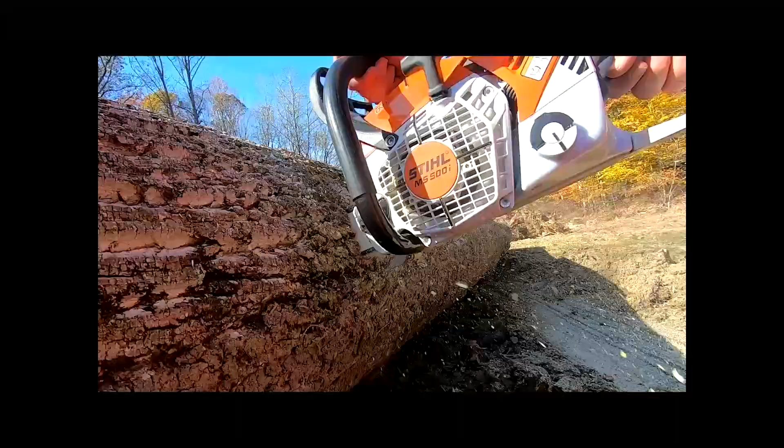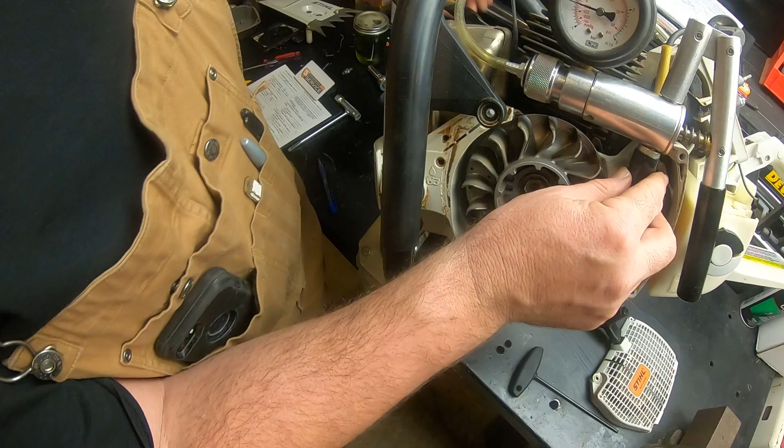Making sure that we don't have a leak anywhere. I think we're good and tight. We don't have any air trying to get out of there, and we can sometimes miss a little bit of feel, but that gauge will keep us honest on that. We won't be having a problem there that we're not seeing.

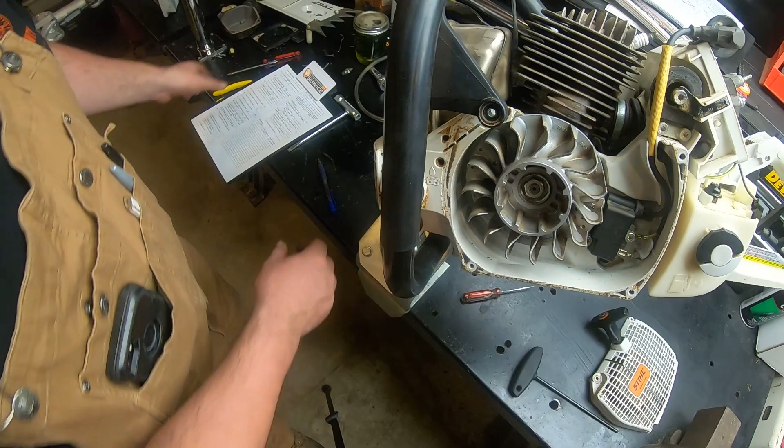So now we have another item we can check off of our list here on our Stihl Engine Check. So we're down here to crankshaft end play, is okay. Pressure test the carburetor. And now this right here is all going to be on our carburetor.

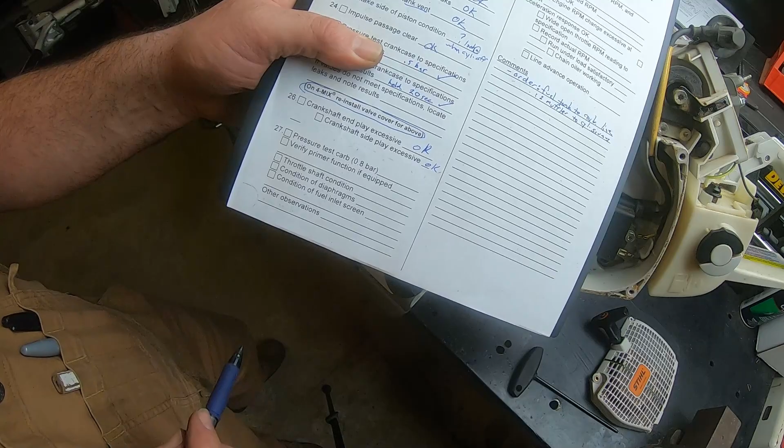All right, since we used our carburetor for a test device, we're going to have to retrieve it real fast so that we can use it.

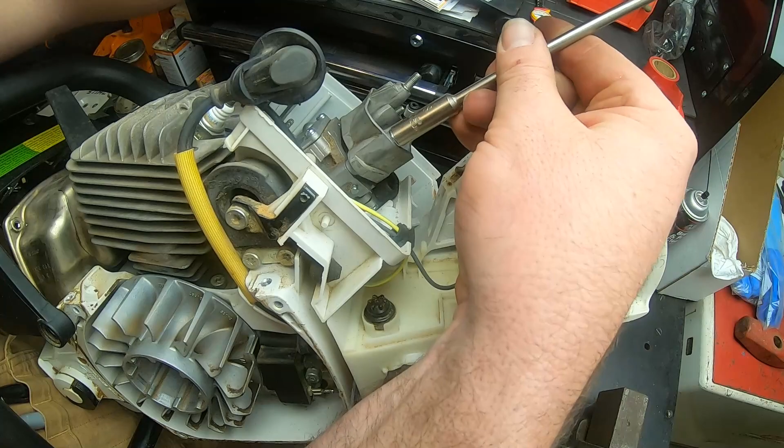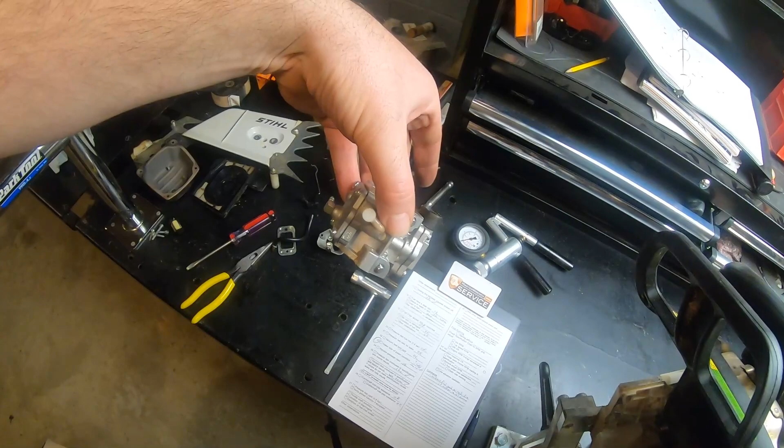Set that out of the way, put our screws or nuts with that. We're just going to use this guy out of here. Now, most times whenever we are dealing with a carburetor, it's just about more beneficial to change it out. And what I'm going to do, I'm just going to take a piece of bulk fuel line, push up on there, put the other end in our tester.

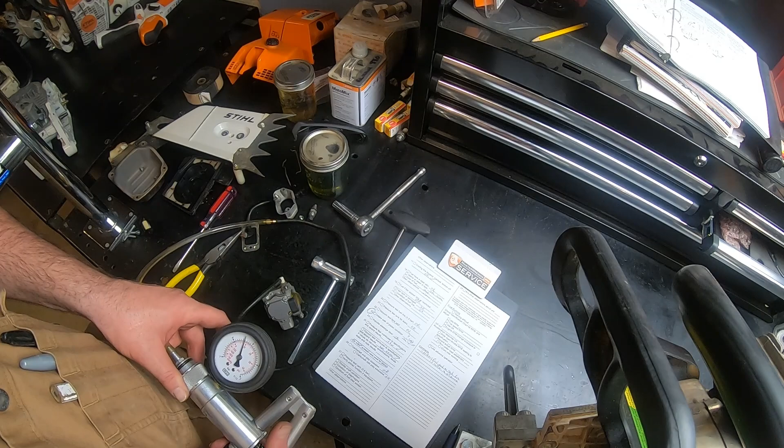And our pressure spec here, according to our sheet, is 0.8 bar. So look at that, I hope you can see that. So we're going to again inflate this air system right here to 0.8. Now, unlike our tanks, we're kind of back like we were in the beginning. It's not going to take much to get that pressure to 0.8 bar. So we're just going to poke on this real gentle, put up to 0.8 right there.

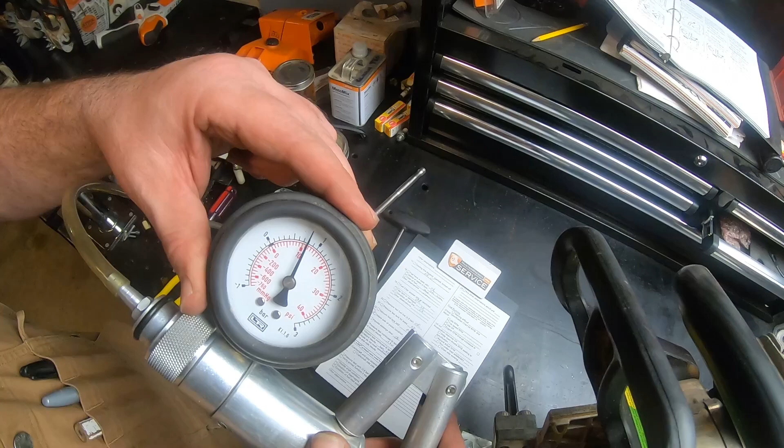Okay, we're going to test it. It seems to be holding really well. We're hanging out right there where we need to be. So we're going to check this off as okay.

Verify primer function. Now what we want to do now is go ahead and look at our throttle shaft to make sure that it is where it needs to be.

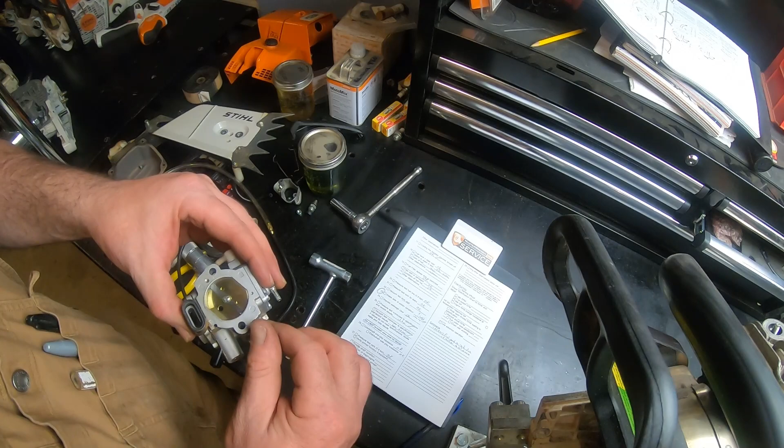So we'll remove that guy. And we want to check, now this is going to be our choke plate here. It's the first one we come to when this is the way the carburetor sets on the machine. So the first one you come to, the choke plate, the one around behind it is going to be our throttle shaft. So we're going to feel that thing, make sure it feels tight in every position, and it does. It feels great, no problems there.

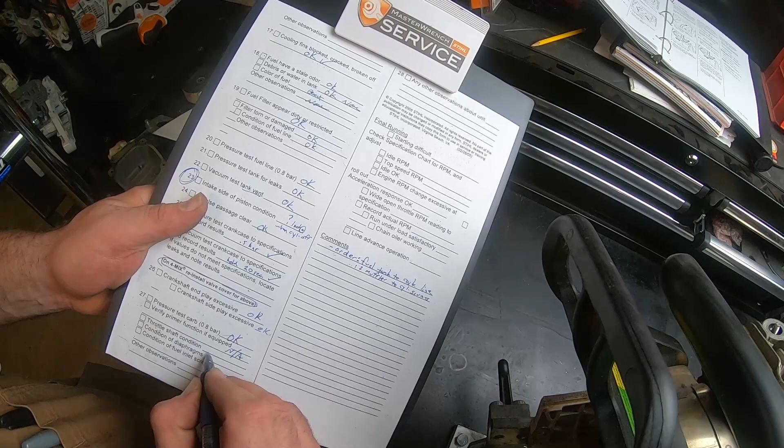All right, and again, we verify primer function. 880 does not have one, so we'll just put NA. Throttle shaft condition, okay. Condition of diaphragms. So let's look at our diaphragms here real fast.

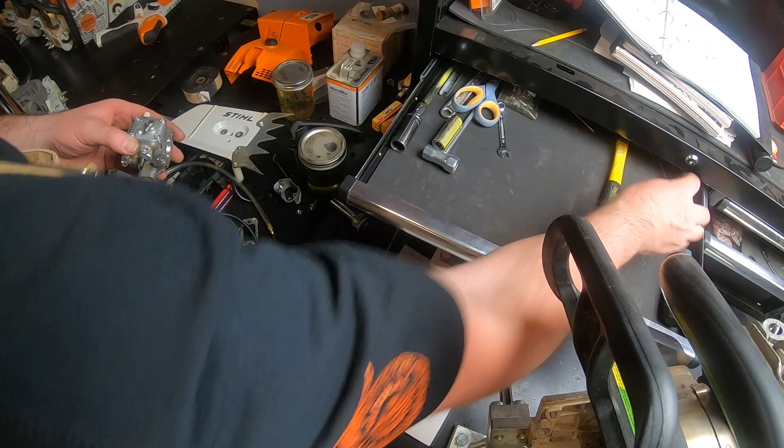And to do that, we're just going to take a little screwdriver, peel this guy apart. And again, this is going to be our fuel pump side that we talked about earlier, that where trash can get built up in, that one time we saw. But what we're looking for here is a tear mostly. Tear is going to be our biggest concern right here, or one that is really stiff and not pliable.

If it's gotten hardened, if the material in it has gotten hardened, then it's not going to flex well. So I'm going to hold my thumb down tight on that as I take the last screw loose so it doesn't deform that upper cap. It's just soft aluminum. And then we'll just pop this off of here.

Well, look, okay, all that looks good. I don't see any problems there. We have little flaps in there. All that looks okay. Alright, I don't really see any problems there. The flaps all look good.

So we'll just put that fella right back together. And sorry, it's most likely the other side going to be where the fuel pump diaphragm is. This is their, it pulls all the way through there. So let's just bolt this back together.

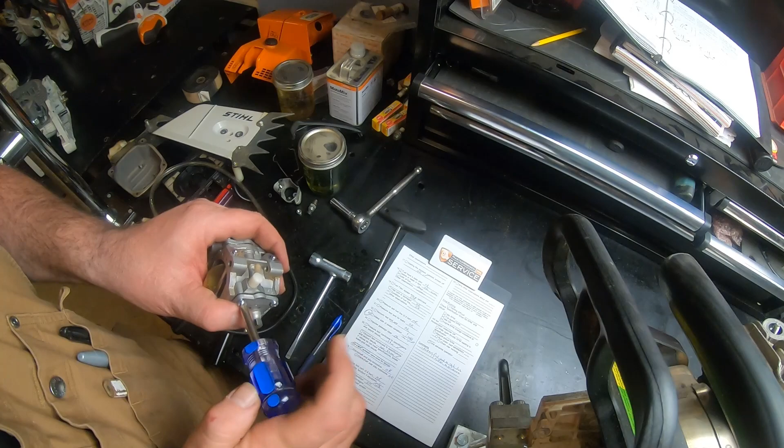I've not had one of these big Walbros apart before. This feels like more like it should be on a 5-horse Briggs or something. It's a monstrous thing. I'm trying to think. Well, those are just big old plates. I like 880s, they're pretty awesome.

All right, let's pull this side off real quick. Take a peek at it.

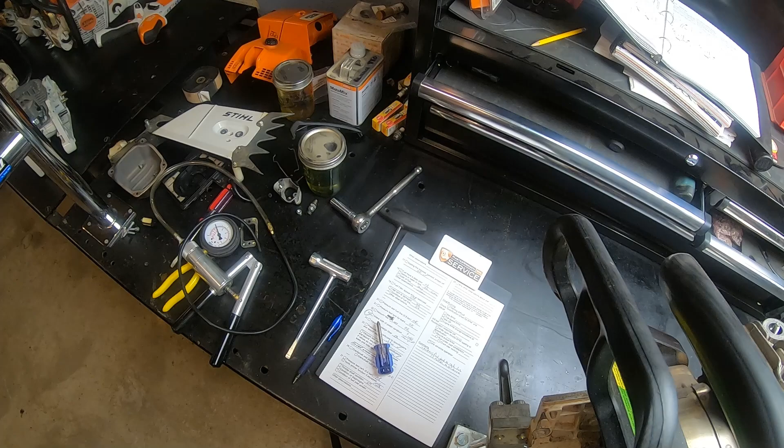Take just a minute and spray some of this off of here. Don't want that dirt getting down in everything. Oh yeah, at least it leaked on our paper, right? It should dry fine. Yeah, that looks better.

Excited to get this thing back together.

Yes, here's our fuel pump side. This is going to be our fuel pump diaphragm, and it should be going up and down. We just spray that, when I had that screw out, it put a little bit of gunk in there. There we go, yeah, that looks really good. Now what we're looking for is pliability. That looks good, I don't see any tears in there. So we're going to say that fella looks okay. You can kind of see there.

Okay, our carburetor all looks good on our fuel pump side. All the little pieces on the other side look good. It pressure tested good, so we're going to call this okay. We don't have a problem here. Now let's go ahead and put this back together so that we don't get it contaminated.

While we're putting it back together, I want to talk a little about our sheet. Before we go any further, let's make these notes. Condition, okay. Condition of fuel inlet screen, okay. All that's okay, good.

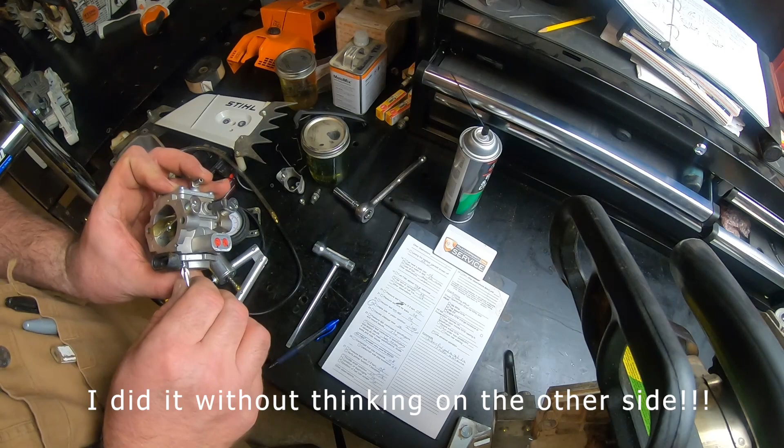I'm just starting these screws to where I can feel them start to touch, and then I'm stopping. I don't want to tighten them up. You always want to start them all before you go to snug anything down. It just makes it really difficult and can cross-thread something. So here we have just a gentle snug on all these. Again, we're not torquing a head gasket here. All we're doing is putting a screw into a little aluminum piece, so we're not getting crazy with it.

Double check these since we had them apart, and then we'll know this carburetor is good. We'll get the surface junk off of it before we put it back together.

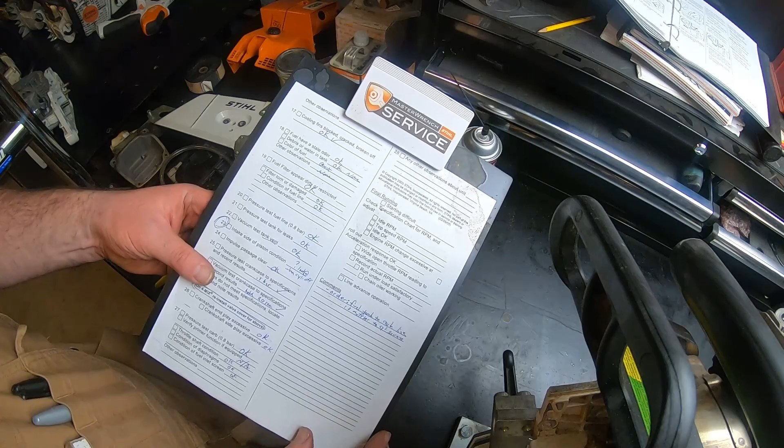Okay, now let's talk about this for a minute. Intake side of the piston, we're going to look at that a little closer when it comes off of there.

Let's flip it. Oh my goodness, looks like that gasoline ate our clipboard, or not gasoline rather, but brake clean. Well, that is really handy. Okay, let's just remember what we had here. Gotta love it. You can't make this stuff up.

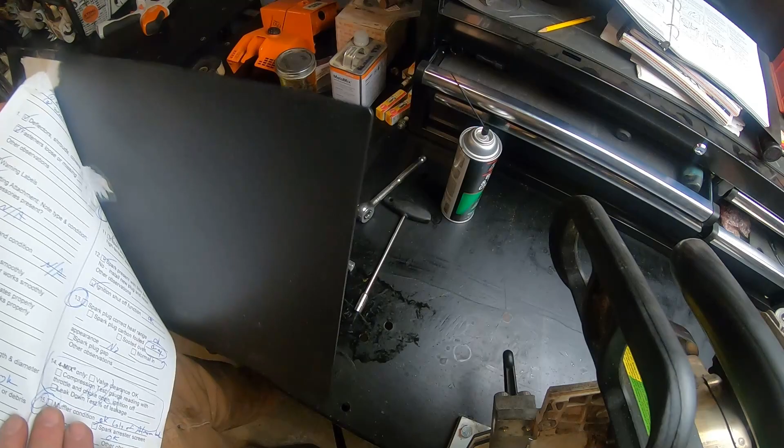Okay, here we are, our other half stuck there with the brake clean. Don't get brake clean on a plastic clipboard.

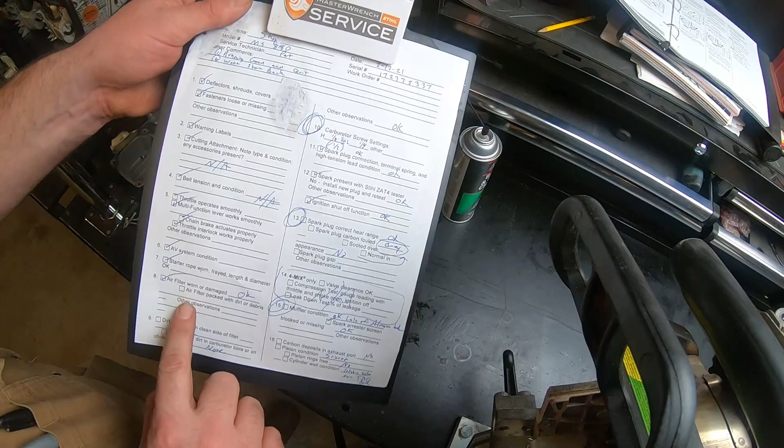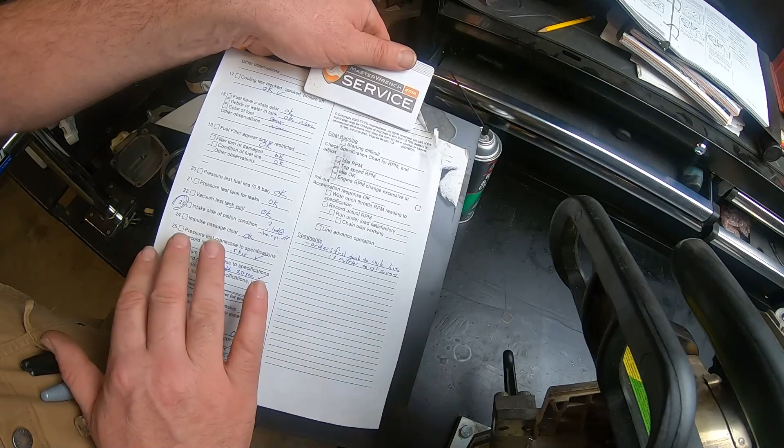All right, so everything tested good down through here. Our first problem that we had here was right here. We have a couple things circled. So let's take a minute and play detective. The only thing on the back was this. We're going to look at it when it comes apart. It's not really an issue right here because both of those parts, the piston and the cylinder, are in trouble on this side.

So let's talk a little about this side for just a minute. Again, if nothing else had been circled, we'd want to look more at that, but we already know those parts are in trouble. We're going to take note of that when we completely take it down. So let's look at different things here.

I kind of like to get these into cause and effect. Will this be a cause of a problem, or was this the effect of a problem that happened? So if we have a lot of aluminum on a muffler, did that cause a problem, or is that the result of there being a problem somewhere? We're going to mark that down as being a result.

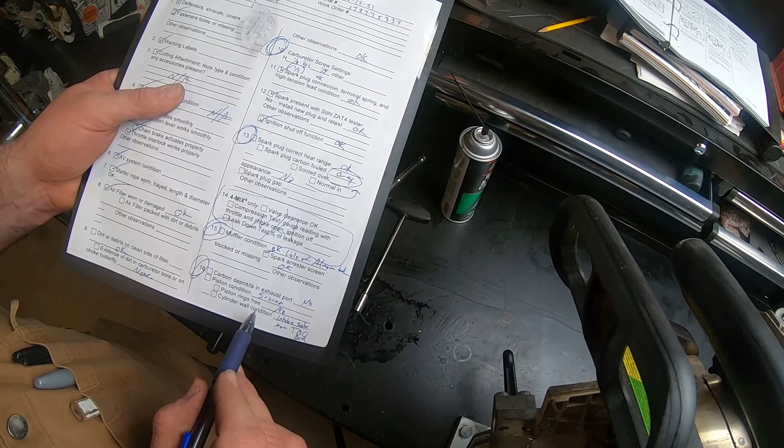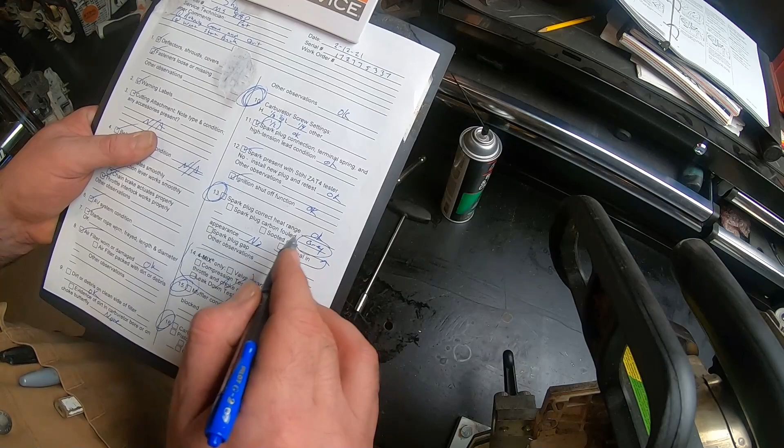The piston condition, I didn't circle that, should have. The piston condition scored, tore all to pieces. That is the result of a problem. Spark plug, all of that was good, but it had a gray color. Did the spark plug being gray cause something to have a problem, or was it a result of something? Well, I think it was the effect of that.

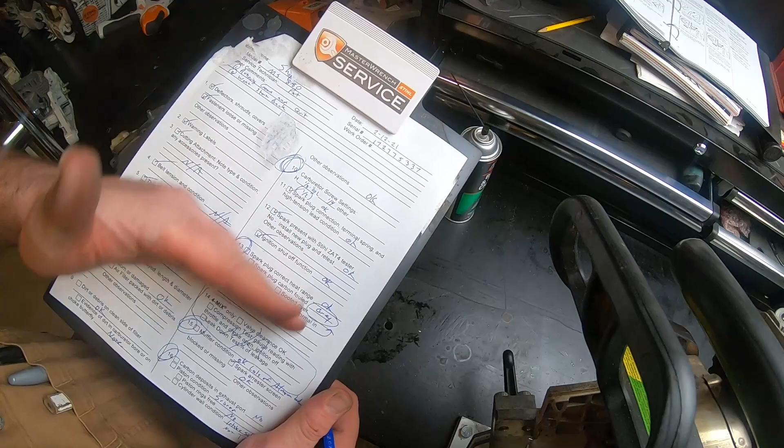Now, the only thing that we found so far that could be a problem, the thing that caused these things to happen, is a carburetor screw. Everything else we saw, everything was good, everything pressure tested. The only thing that we didn't pressure test, let's back up and test this fuel line right here, because this technically could be an issue.

Now that we have this scrap piece, I think we can test this guy. Yeah, I believe we can. So let's plug out, because I want to make sure we remove any bit of doubt of anything.

All right, so here is our fuel line. So it should hold, and it does. So that is the only questionable piece that we didn't have a good way to test when we did our sheet, and it is holding pressure.

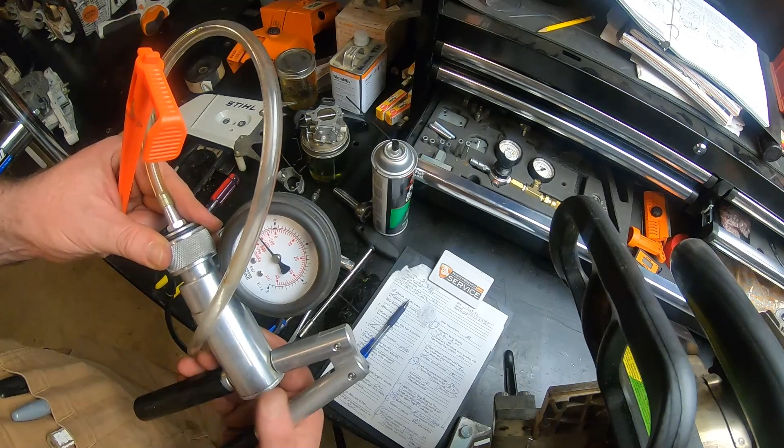And vacuum. Now, was that 0.5? Let me see what our fuel line was supposed to be tested to. Pressure test fuel line 0.8. Let's go to 0.8. There we go.

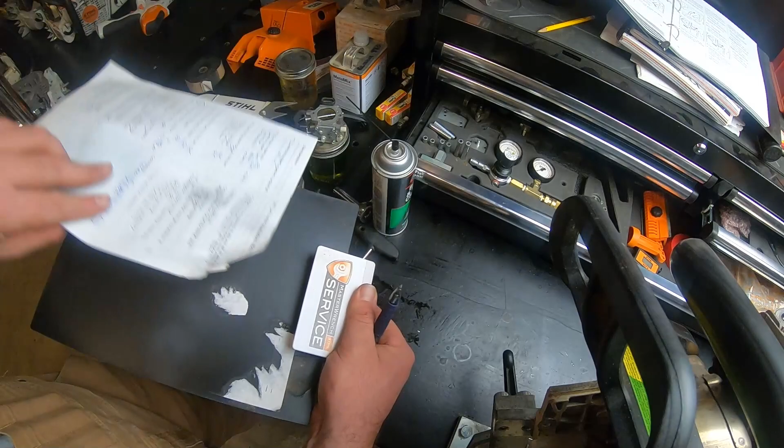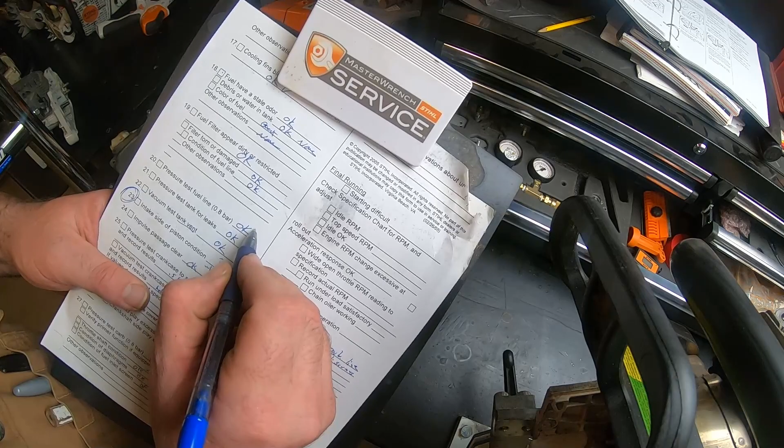Holding great. Now let's do pressure to 0.8. Holding perfectly. So now we have absolutely ruled out even the fuel line there. So our fuel line tested okay all the way through there. So our tank and our fuel line, everything there was testing okay.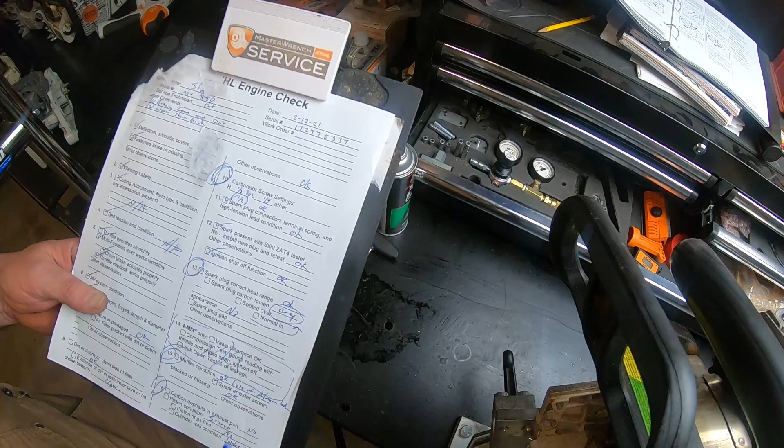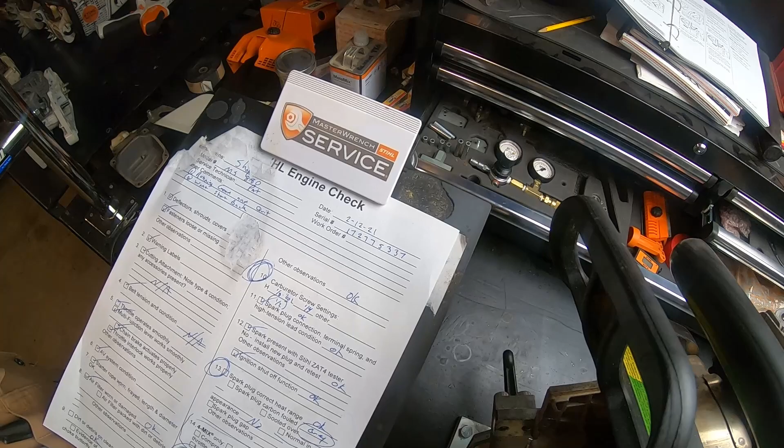Now, so we have four things here circled. All of these right here are the result of some other problem, which I feel we can narrow down to this carburetor screw being set incorrectly. So now we're going to be able to look at this and say without any doubt to the customer, if this was a customer to us, since it's our machine, that carburetor screw somehow wasn't where it was supposed to be.

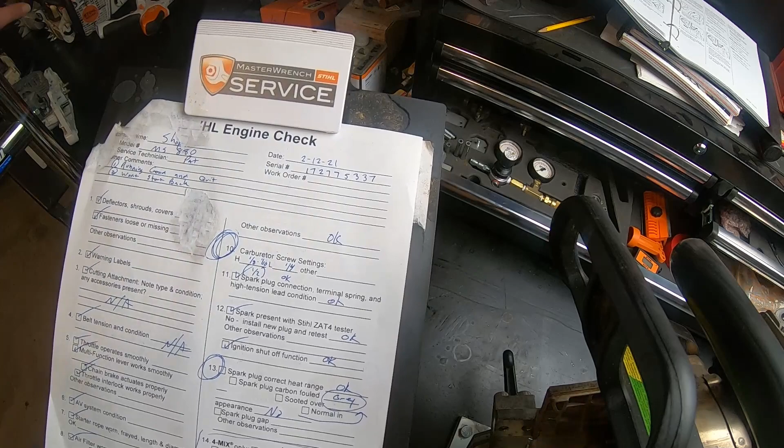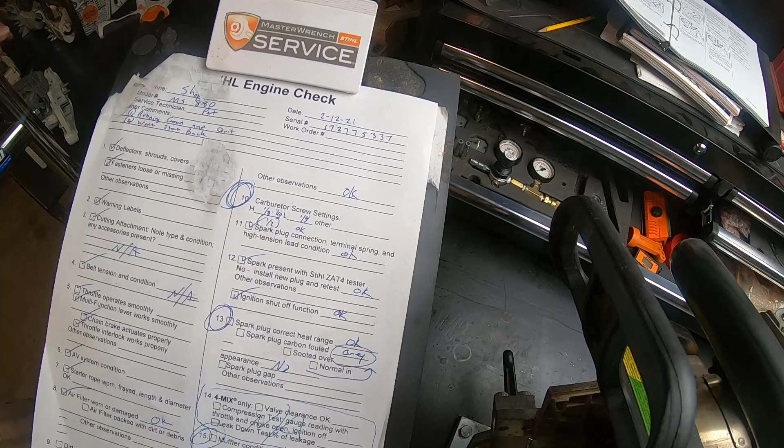That carburetor screw not being where it was supposed to be is getting ready to cost an enormous pile of money. So this would be a good lesson for folks who don't have to learn it themselves: be sure you're not just playing with carburetor screws if you don't know what's going on. I don't know what happened here. Somebody could have been fooling around with it, or it could have vibrated. I really don't know, it was a complete surprise to me when it quit running.

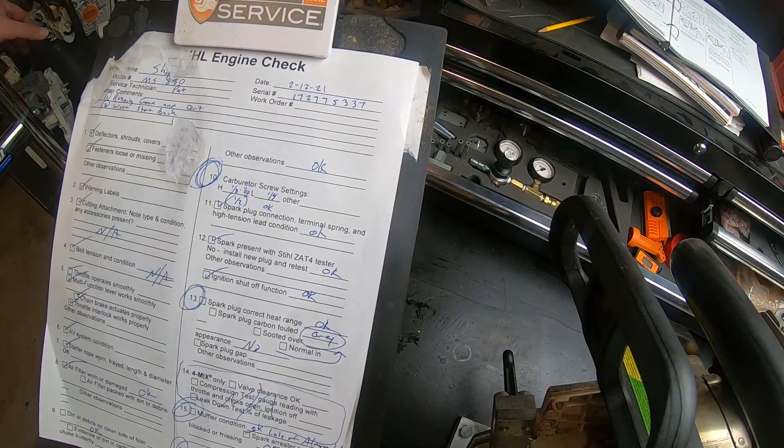One of our students was operating it, cutting a big old cookie off a monstrous stump out there on the lot, and it just quit and never would start back. We fought and tried to get it running, and decided this will make a good Stihl Engine Check video. So here we are.

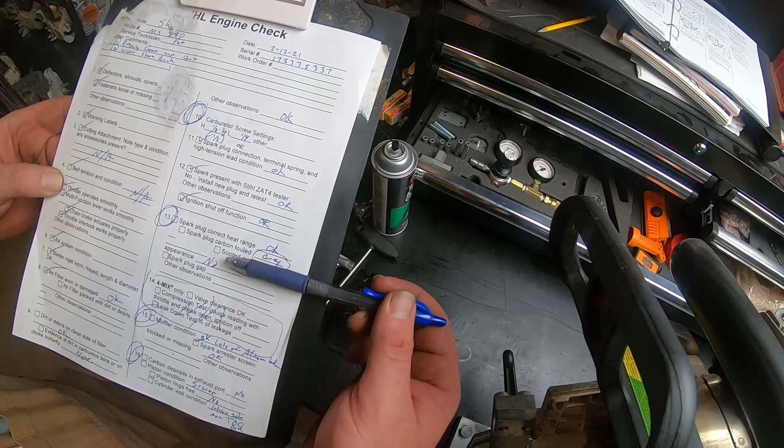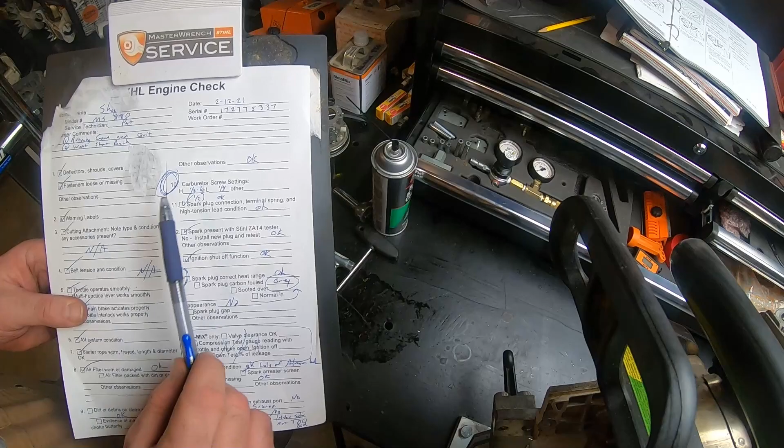So the point of all this is these are the things we're going to see as indicators to that being the problem. Now if we'd had a leaking crankcase, or a fuel line leaking, we could have attributed it to one of those things, but we ruled out all of those problems. The only thing left it could be was that carburetor being out of adjustment. So it's very, very important that we take note of those things and make sure they're adjusted correctly.

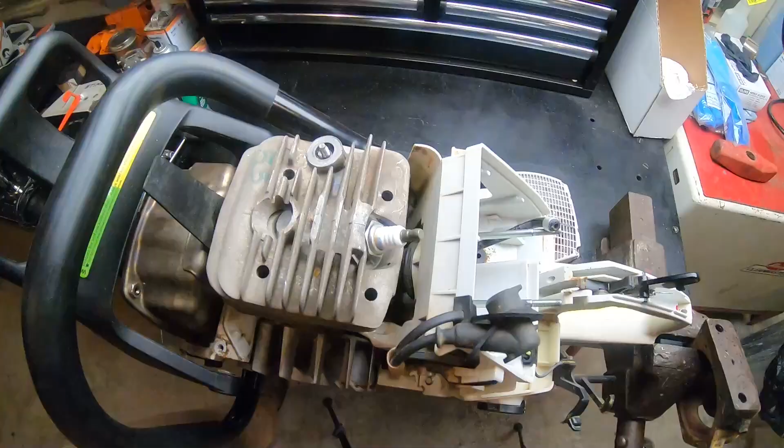All right, let's go ahead and get this thing ready to put away. I want to get this cylinder off because we want to look at the intake side of the piston. It all has to come off anyway, so we're going to do that and get our parts ordered up and have everything ready to go when we get back here next week, so we can get this thing rolling.

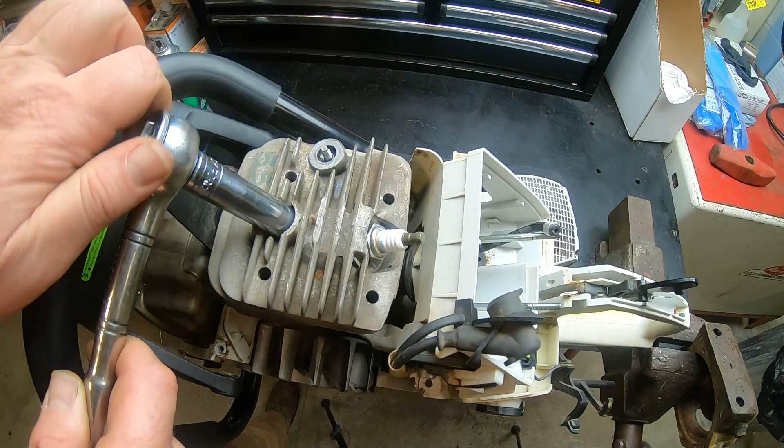Now we're going to take this guy out because this goes back in our toolbox. We don't want to leave it in the old cylinder - it's getting ready to be put on the shelf of stories. That's the way that goes. Let's put that little fella up so he doesn't get lost.

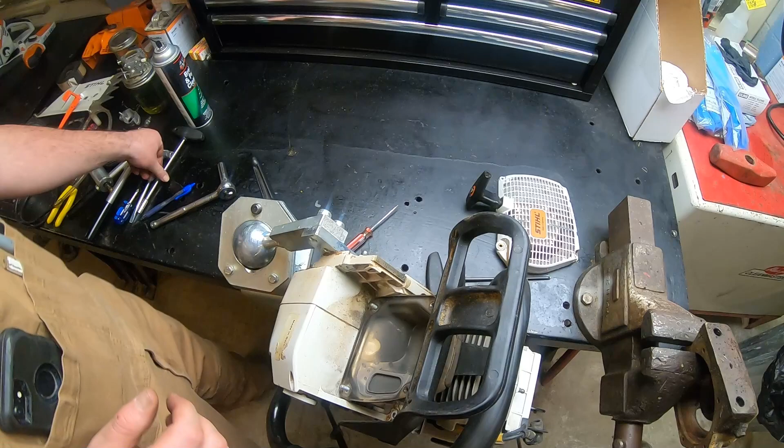Now let's go ahead and remove - actually before we pull those cylinder bolts, we need to get our muffler off, so let's do that real quickly.

We have on our list, we're going to order 2 of these little screws here and a fuel line, if I remember correctly. Yes, fuel line and 2 of these screws, in addition to the rest of the parts.

Now, when we look through here, do we need crankcase seals? No, we're not going to disturb it. If we were going to pull the crankshaft out for any reason, we would put new crankshaft seals in it. This saw, sadly, has only had probably 10 tanks of gas run through it. It hasn't been - honestly in our area this is more of a novelty thing than a necessary thing. We can get by with what we need on those 4 series, 5 series, 6 series saws.

But again, I bought this saw so we can have the whole lineup of equipment here, not only to run but to work on. So it's not one of those things where we have to have it, but we do have a project coming up soon that we're really interested in using it for, and I want to get it going so we can do that.

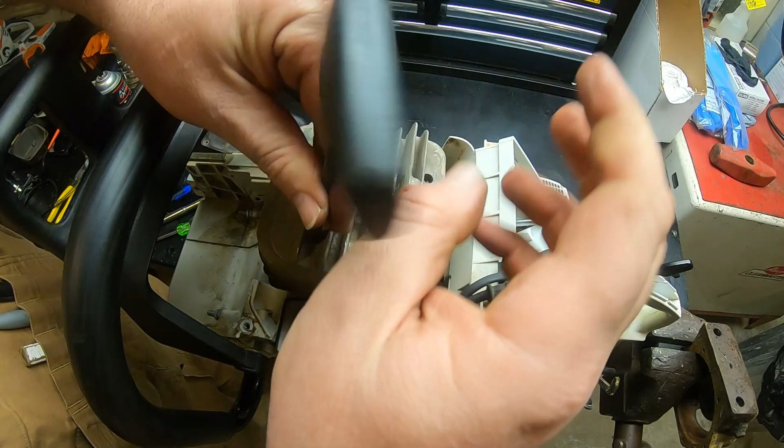All right, so we're going to try to see if this screwdriver will fit on you. We're just going to loosen this - I'm not going to take it all the way off if I can help it. Yeah, that looks good. All right, now we've got 4 screws here to remove our cylinder. It was tight. One.

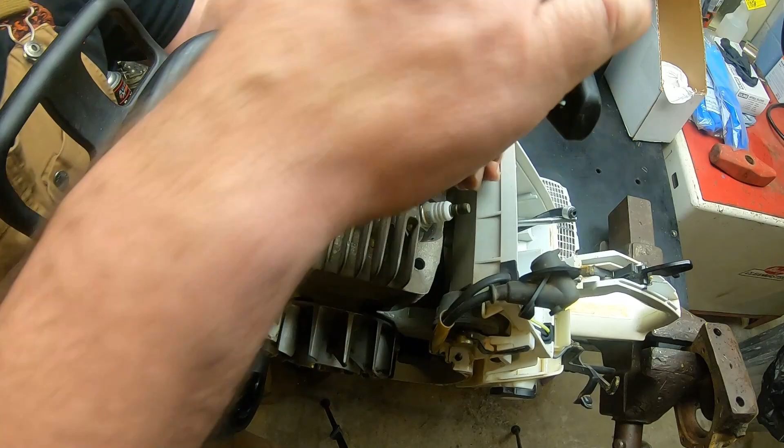That's what I love about these pro saws over the occasional-use type saw - tearing them down to get to the engine, the piston, or the cylinder is very, very simple.

Now, this video - I'm kind of trying to keep track of how long it's getting. It's pretty long, and it really doesn't take this long to do a Stihl engine check. I'm spending a lot of time showing you the different things and talking about stuff, and that's really adding to the time. The Stihl engine check itself shouldn't take too awfully long to do. Some of the newer saws that are a little more complicated will take a little longer. Saws like this, they're not that bad - they shouldn't take forever to do.

Just want to ease that boot out of the way.

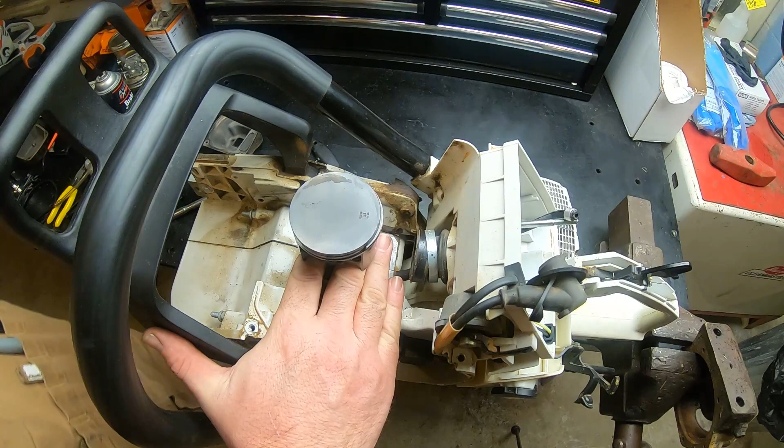So now we're going to pull this jug or cylinder up off of the piston, and I'm going to stick my fingers in here and hold it so it doesn't bang around, and we'll take a look. I'm going to lay that cylinder down for a moment and grab my little block of wood because I really don't want to tear everything all to pieces here. If that piston beats around on this surface, it can scratch it, so we'll put our little piston holder tool right there and we'll look at things.

Now look, on this side the rings are not stuck, but on this side they are. Kind of see here how they've just been washed to no end. Now let's look at the intake side of our piston. It doesn't look bad, does it? There's a little bit of rubbing right there, but it's really just wet. Let's spray it off real quick.

Yeah, see a little bit of rubbing there, probably because the other side was getting so big. So we have our intake side here, looks rough. I mean our exhaust side looks really rough. It's very scratched and pitted, and the rings are, you can't really differentiate what's what there because they're so stuck, but wiped across. This is very, very telling. Now we're looking at this and we see intake side good, exhaust side bad, and we'll take this information and let me just show you something really neat.

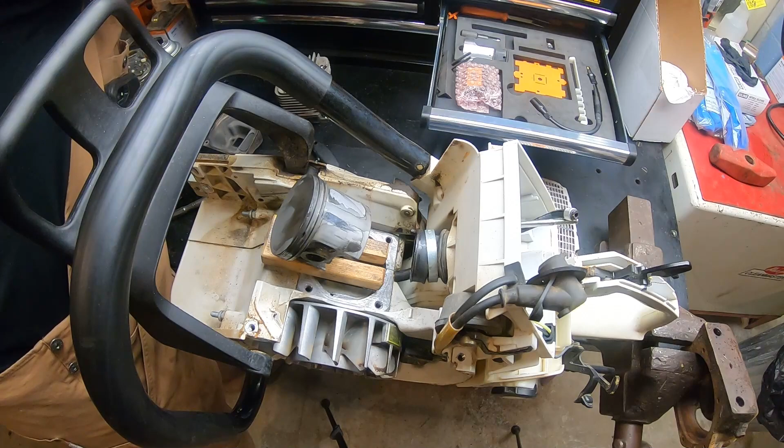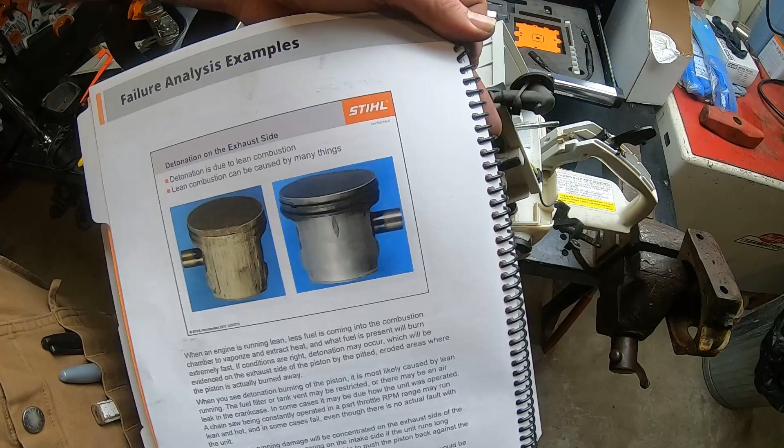All right, so now we're ready to let the story be told. If we have this lean combustion, it can be caused by many things. Now we've talked about that - we have our screw that wasn't right, air leaks.

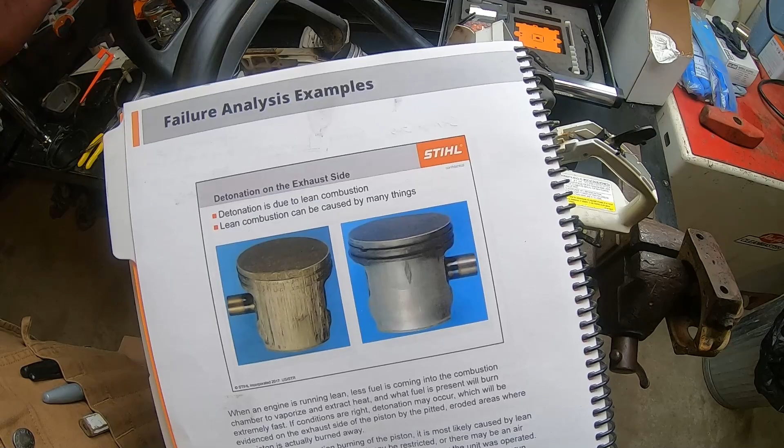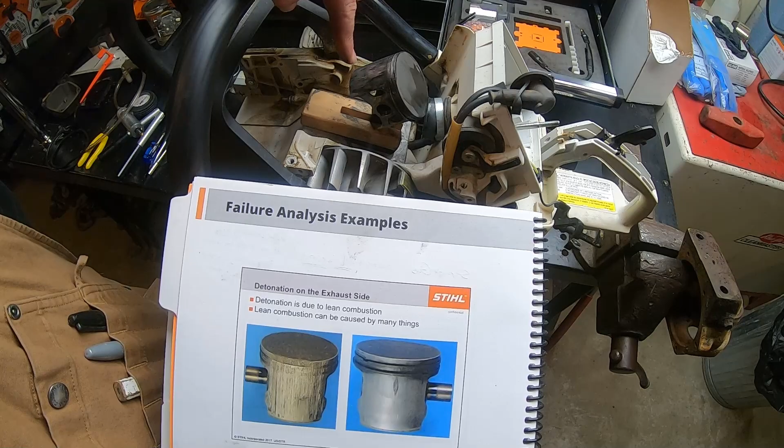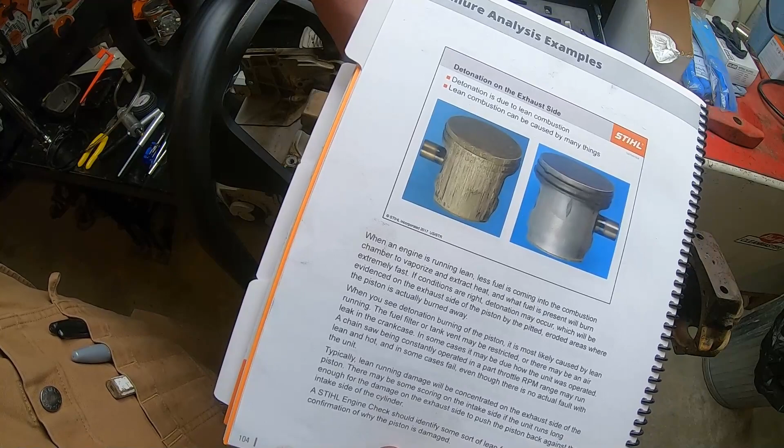Here is the intake side of our piston. We notice our rings are still loose. Let's look at our exhaust side of our piston. We see it scratched all to pieces. So what we have here is a very frustrating situation. We have a little problem of too lean ending up destroying our engine.

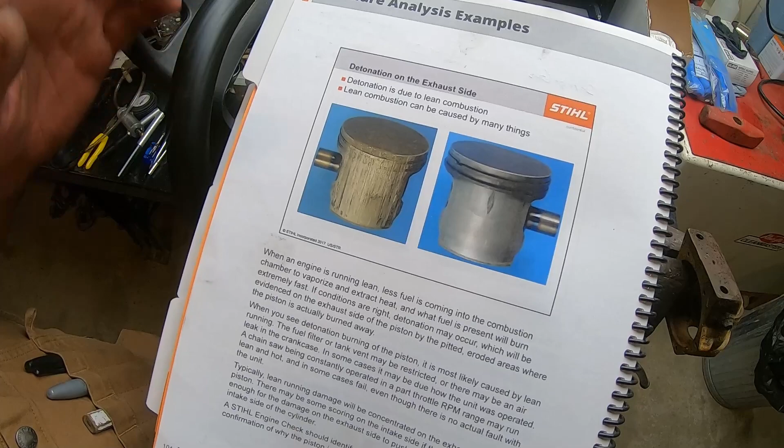So when we see this just on this one side, are we able now to see what could cause this? So let's just read this. It says, when an engine is running lean, less fuel is coming in the combustion chamber to vaporize and extract the heat, and what fuel is present will burn extremely fast. If conditions are right, detonation may occur, which will be evidenced on the exhaust side of the piston by pitted, eroded areas where the piston is actually burned away.

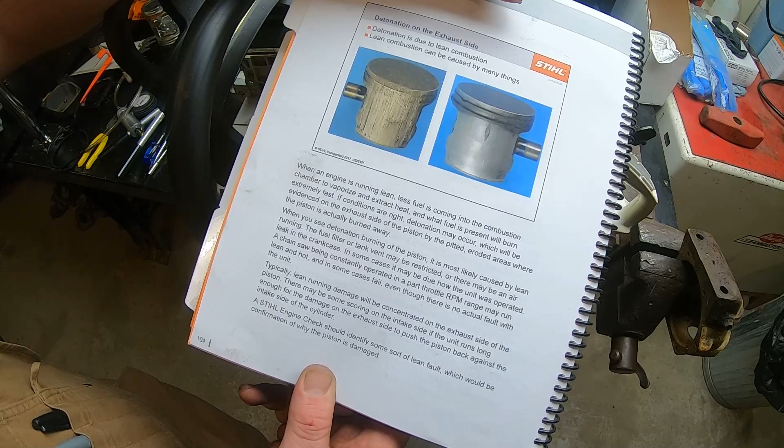Now, we didn't have a ton of that - we were probably in the beginning stages of that. When you see detonation burning of the piston, it is most likely caused by lean running. The fuel filter or tank vent may be restricted - again, we tested those, we're in good shape. Or there may be an air leak in the crankcase - again, not necessarily the problem we had.

In some cases, it may be due to how the unit was operated. I guess we have to say that because it would be operated with the screw in wrong. So let's just call it that. A chainsaw being constantly operated at part throttle RPM may run lean and hot, and in some cases fail, even though there is no actual fault with the unit. So we didn't see a fault anywhere except for a high screw.

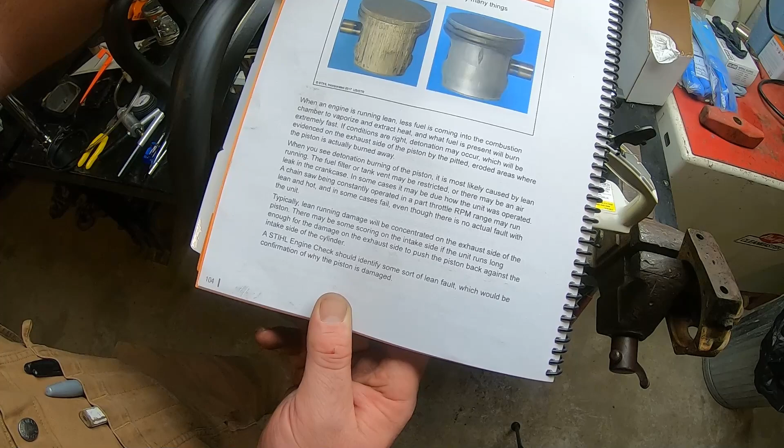Typically, lean running damage will be concentrated on the exhaust side of the piston. There may be some scoring on the intake side if the unit is run long enough for damage on the exhaust side to push the piston back against the intake side of the cylinder. It says here a Stihl engine check should identify some sort of lean fault, which would be confirmation of why the piston is damaged. So I feel like we have done due diligence on this.

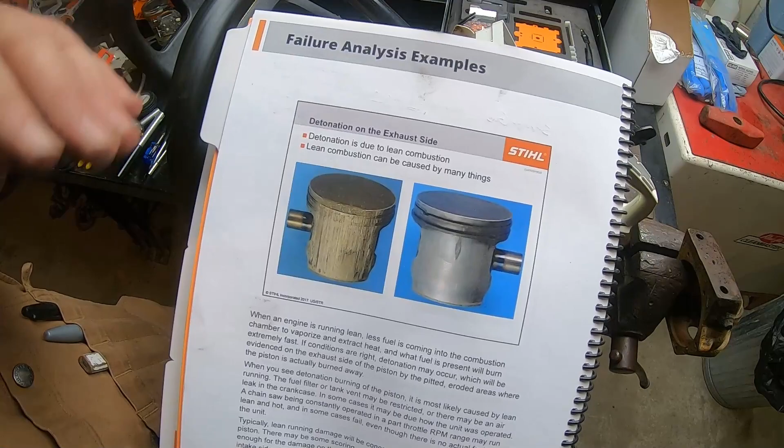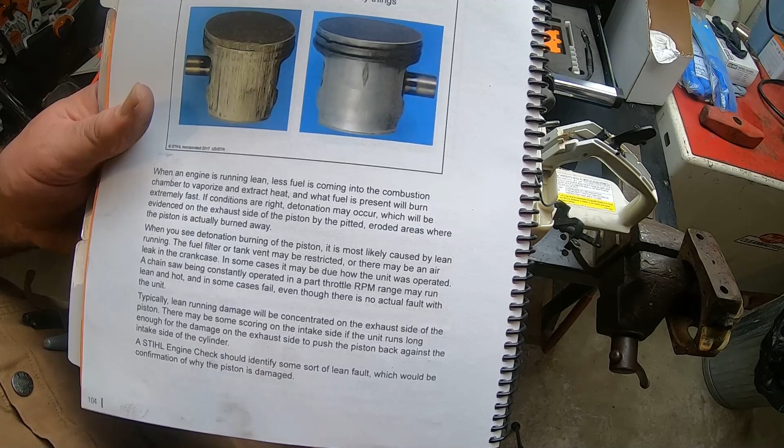We have gone through, we have identified these pictures here. We see a very similar picture painted on our piston, on our exhaust side and our intake side, as well as when we did our engine check, we did find an issue with our air situation of our screw being turned in wrong. So we're not going to be sending enough fuel with the air that's going by, so we have too much heat. You know, that fuel pulls the heat away as it touches it.

I don't know if you've ever been to a place, State Fair comes to mind, where they have this big fan set up that sprays mist in front of them. When it hits you, it's super cool because that moisture hitting you and then the air going across it just wicks the heat right off of you. Same thing on this piston. When that fuel-air charge comes through that carburetor and comes up through the transfer ports and hits this piston, it is cooling it down very quickly. And when we don't have enough fuel, it can't cool it down quick enough. And here's what we have.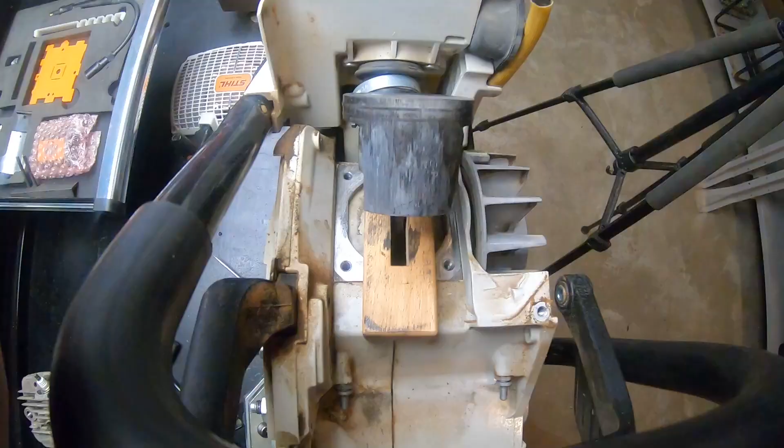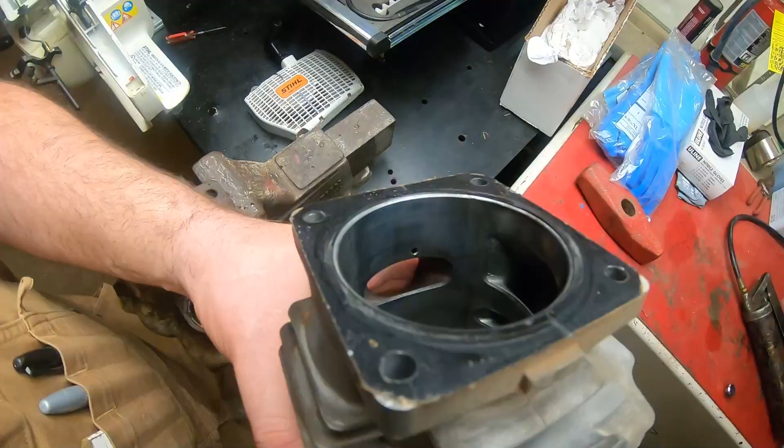All right, just a quick shot of our cylinder here. There's our exhaust side, all scratched up. There's our intake side, not looking horrible. If the whole cylinder looked like that, it'd probably run just fine.

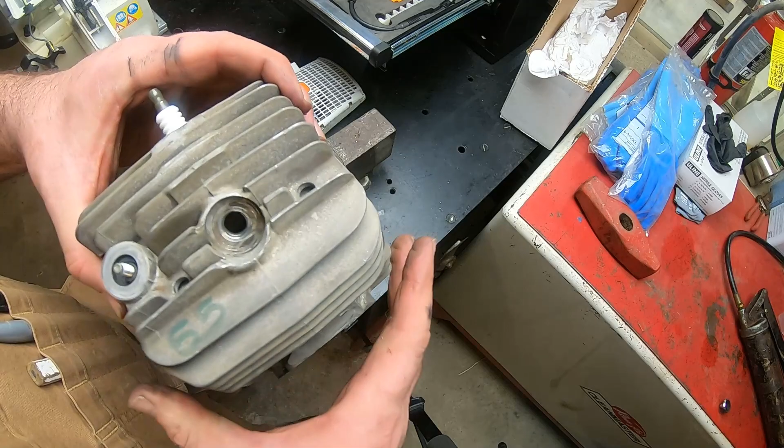But when we get over here - I don't know if you can hear that, hear those scratches in it - my fingernail falls in the grooves. All right, so we'll get us some parts ready to put back in that thing, and we'll bring you along for that ride as well.